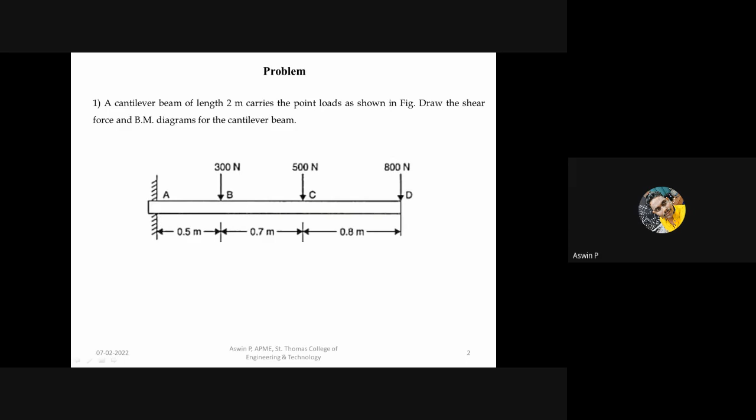For that, we will take dimensions from the right hand side, that is point D. From point D onwards, we will find the values. So when you take point D, you must remember the sign convention. For that, we have given you an example, a small word, that is RUN, R-U-N.

Please remember this thing. If a beam is there, and there is a right upward force, that is RU, right upward force. If there is a right upward force, then that will be negative. And obviously, right downward force will be positive. If you start from the opposite side, this will be exactly opposite.

That is, left upward force will be positive. Please note down, this is an important thing. And left downward force will be negative. This is very important when you are starting. If you are starting from this side, in this direction we are solving, you have to take this sign convention. If you are taking from this side to this direction, then you have to take this sign convention. This is mandatory. From which side you are doing, that's important.

And in case of moment, the same beam can be taken. This will be a straight line. When I am drawing, there will be small bulbs. So when you are taking a beam like this, there will be two kinds of moment. If you are taking all moments from this right hand side, anti-clockwise will be positive. Sorry, anti-clockwise, not clockwise. This is clockwise. Sorry. Anti-clockwise will be positive and clockwise will be negative. Similarly, when you are taking here, anti-clockwise will be negative and clockwise will be positive.

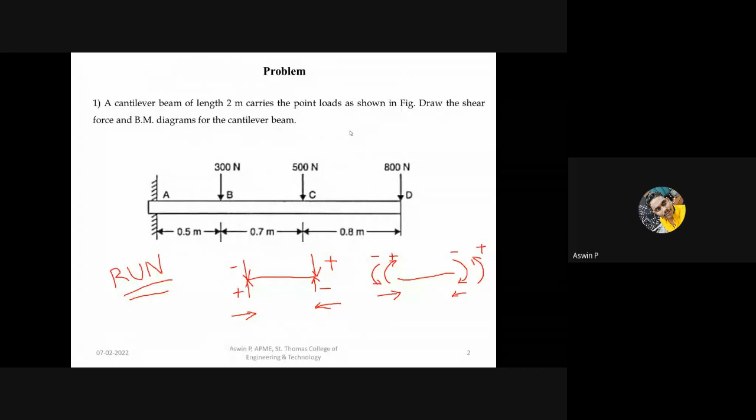Draw the figure. I will show the shear force diagram figure, because in that figure you can note down the values of shear force diagram as well as you can draw the figure. Some people may have drawn the figure, so don't waste it.

Actually, this is the SF diagram. This is the SF diagram.

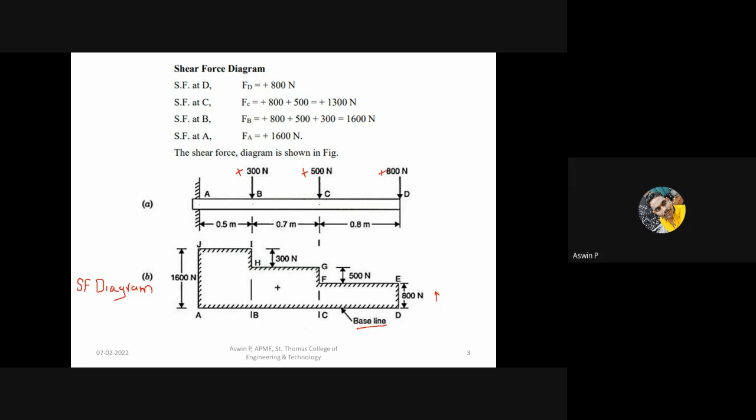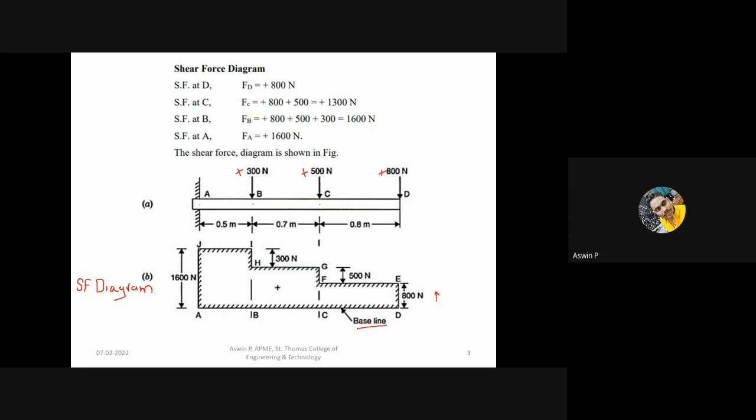Okay, thank you. After that, you need to draw the bending moment diagram. For that, you should find bending moment at each point. For that, one minute, I will take the figure here.

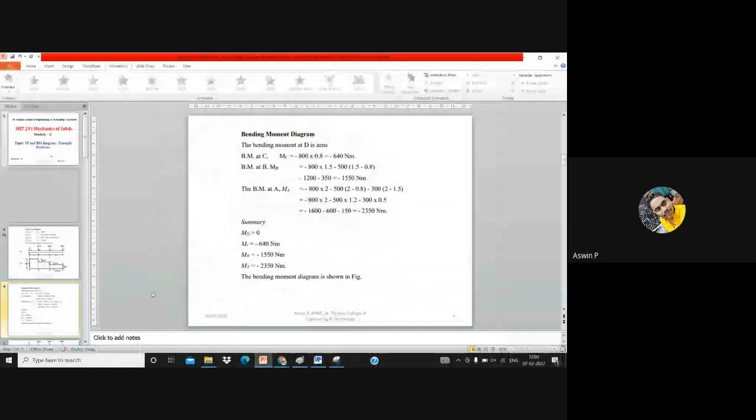Okay, for finding bending moment, we have the figure here. For this beam, we should find the bending moment. For that bending moment, also I am calculating from the right hand side.

That is, when you are looking at the point D, you can see that there will be a load of 800 acting at the point D, and you know that bending moment is the multiplication or product of force and perpendicular distance. So when you are looking here, the load is acting at point D where the distance is 0. So bending moment at the point D will be 0. There is no need of calculation, 800 into 0 will become 0. So you can write it as bending moment at D equal to 800 into 0 equal to 0.

Since this is acting in the downward direction, obviously this will be acting in a clockwise direction. Now taking point C, I will take the point C, one minute.

When you take the point C, you can see that according to this point, this load of 800 will be acting in this direction. And due to that, the moment will be acting in the clockwise direction, right? According to C, due to load, the load will be acting in the clockwise direction, so the moment will be negative. If you are taking any data from the right hand side to left hand side, the moment will be negative if the moment acting in the clockwise direction - this is very important.

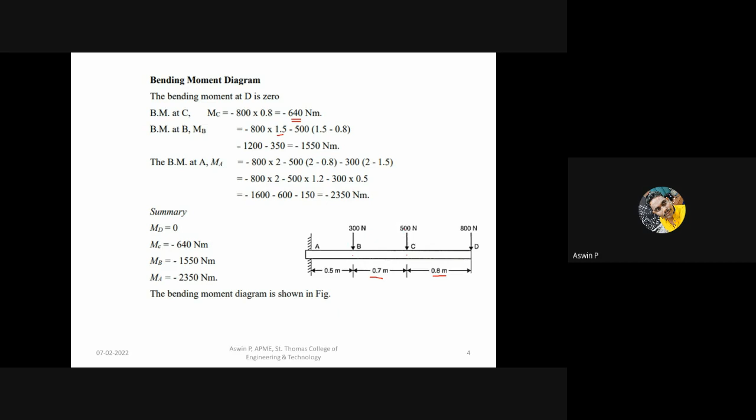I drew that figure only for your reference. You know there is 800 into distance, and the B to D distance should be taken, that is 0.8 plus 0.7, cumulatively that becomes 1.5. When taking C, there will be 500 Newton into distance BC, that is you can directly take that as 0.7. No need of such explanation, this is not required.

500 into 0.7, 500 into 0.7, the final answer will be 1550 at B. Now we will select another point, that is A.

When taking moment about A, similarly as before, 800 into total distance, that will be 2 meters, that will be negative, and 500 into 0.7 plus 0.5, that is 1.2. No need of this step actually, you can directly write this one: 800 into 2 minus 500 into 1.2, and 300 into this load into AB distance, that is 0.5. When you calculate that, you will directly get the bending moment at point A.

These are the bending moments, you can summarize the values: bending moment at D is 0, bending moment at C is minus 640, bending moment at B is minus 1550, and bending moment at A will be minus 2350. These are the bending moments.

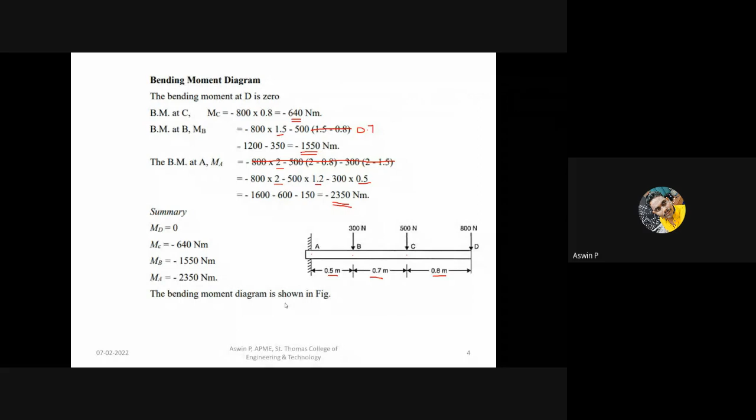Okay, so you need to draw the shear force and bending moment diagrams. As we have an example, you can draw according to this data. Here also you can see there is a minus sign to show that all data is below the line. This is the baseline for the bending moment diagram, and this is the baseline for the shear force diagram. You should highlight which is the shear force diagram and which is the bending moment diagram. This will be the shear force diagram, which is already marked, and this is the bending moment diagram.

Please draw both diagrams, we are having very less time.